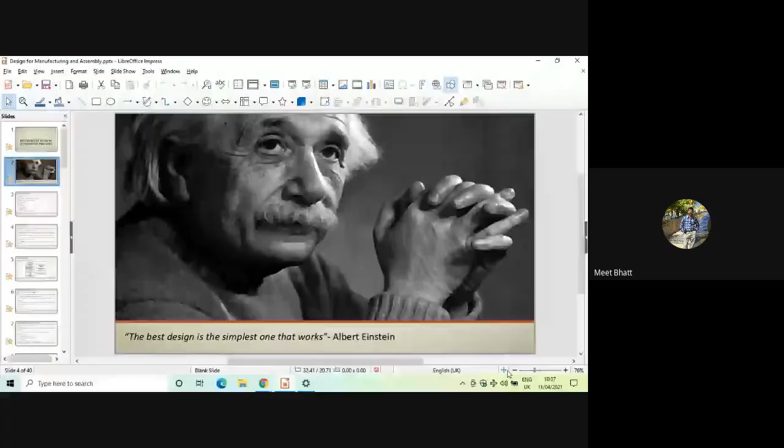I will just switch off my camera to improve... Okay, so now starting with what is DFMA. DFMA is one thing - my screen is visible? No, Meet, no. Oh no, sorry, I forgot, please go for present now. Yes, yes, I forgot to share my screen. Thank you. Now it is visible. Yeah. Sorry, now it is fine.

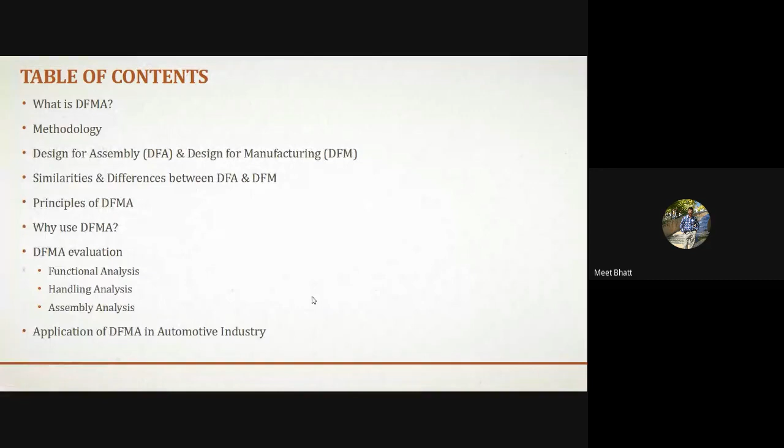Please go ahead. So this is the quote: 'Best design is the simplest one that works.' And second thing is the table of contents, what we have just spoken about. Now coming to what is DFMA.

When any organization, company, supplier, or OEM designs any product, a part or assembly, what is considered is the customer requirements. Customer requirements are based on the function. For example, if we want to sell a bike, the company will decide the function of the bike, then the cost it wants to sell at, and which market segment. If we want to be in a mass segment, we cannot keep the cost at 1 lakh - we have to keep it at an entry level price, around 50,000 to 60,000. We have to understand that people will use it for regular commuting, not for long drives.

And the most important thing is how easy it will be to manufacture or assemble it. One can design a very good product, but it may be very difficult to manufacture or assemble, or very costly. So overall, the product should be a balance between the function, its cost, and its manufacturing feasibility.

If all three are balanced, then the product will definitely meet the customer requirement and it will be successful.

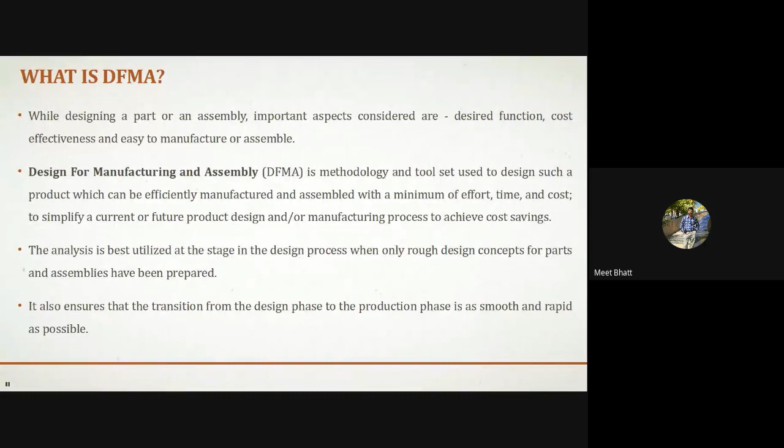Now coming to the DFMA methodology. It is applied as follows: we have a design concept available for a part or product. We then go for design for assembly. In the design for assembly, if there are suggestions coming out for simplification of the product with respect to its assembly, then that input is taken and implemented again in the design concept.

Once the DFA stage is done, selection of material and process and the cost estimate for manufacturing is done in this phase. Whenever any customer or party buying the product asks what will be the price, the company has to finalize their processes, because what material and processes are used will highly impact the cost of the product. So while considering cost, the company has to see what it will cost for design, development, productionization, and also the profit margin. All these things, DFM and DFMA are used to estimate the cost of production and assembly.

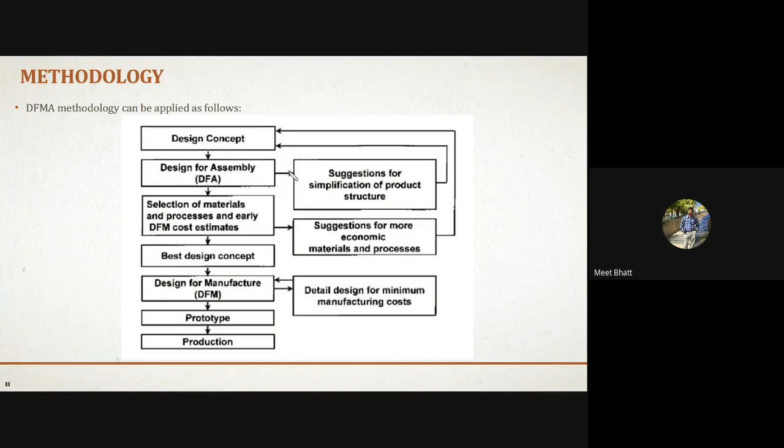So now splitting our subject topic into two phases: one is the design for assembly and another one is the design for manufacturing. Design for assembly is the method of designing the product for ease of assembly. So while designing any product, on one side you have to keep the customer requirement in mind, and on the other side you have to also see how easy it will be for your organization to assemble it.

As I said earlier, you can design a very good product, but it may be very difficult to assemble. And even if it is assembling, it will have a lot of cycle time and a lot of chances of error. So you have to optimize on the assembly front also. DFA tool is used to assist the design team in designing a product that will shift to production at a minimum cost, focusing on the number of parts, handling, and ease of assembly.

So when we are talking of assembly, when you go into any organization, they are speaking regarding the cycle time. How much is the cycle time? How much part it can produce within one shift? So this is one thing which is to be kept in mind while designing a product, which is taken care of by DFA, along with how easy the handling would be and how easy the assembly would be.

And this will go as a significant input for the design for manufacture. So together, this DFA and DFM is called DFMA. The objective of DFA is to simplify the product structure. And why do we do this? Because how many child parts the product has is a key factor in deciding the cost and also the quality.

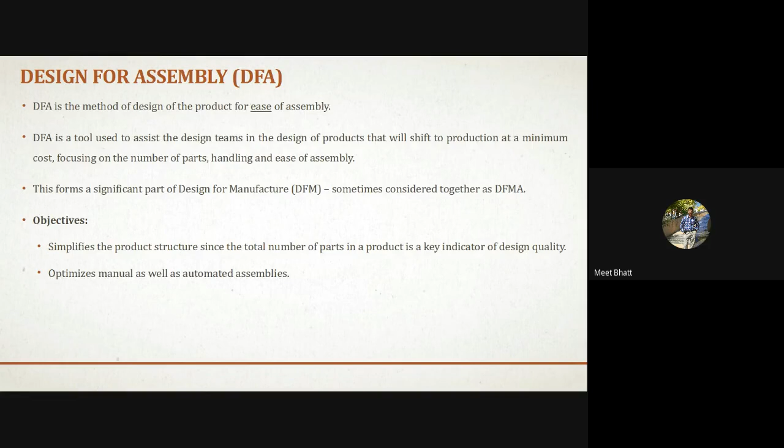Next coming is the design for manufacturing. DFM is a method of design to simplify the manufacturing of the child parts which will form the product after assembly. So once you have decided, okay, I will need 5 child parts and this will be the design, then you are thinking how you will manufacture it. Whether you'll go for a costly material or a material which is just meeting the requirements.

And the second thing is which process you are going to use, whether you will have a fully automated process or whether you will have a semi-automatic or manual process. Basically this will define the cost of manufacturing, how the process will be, and how the material will be.

The broad objectives of DFM are to shorten the product development cycle time, because since you're considering the manufacturing initially itself, whatever failure modes or difficulties are there, you will anticipate. Then since you are also worried about simplicity or reducing complexity, it will definitely help the manufacturing team. Then, as I said, you estimate how much the cost of raw material and the process would be, and if you are reducing the number of components or number of stations, it will also reduce the production cost.

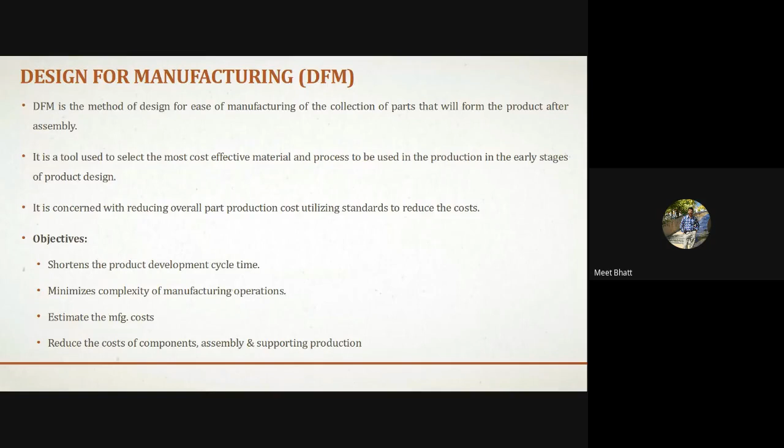Now coming to the similarities and differences between DFA and DFM. Basically these together are called DFMA, but just to have clarity, DFM and DFA both seek to reduce material overhead and labor cost. As the name itself suggests, your design thinking is towards the manufacturing and assembly of the product.

So it is totally like the benefit of the organization which is manufacturing itself. Look, the customer is only paying for the product. He's not bothered how much it will cost you or how much overhead you will need. One organization can make a product with more overhead. Let us say organization one is making a part with 100 manpower, and organization 2 is making the same product with 80 manpower.

So definitely this 20 manpower cost saving is going to increase the margin for the supplier who is making the product, and in turn he may also give a competitive price to the customer. So the customer is also definitely going to go towards the one who is giving the lower and more competitive price. Then the second thing is they reduce the product development cycle time.

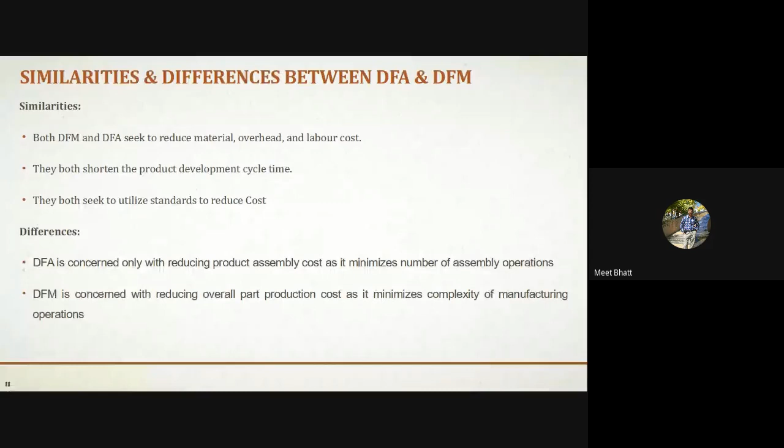Okay, so basically now we are coming to the main part of DFMA. But just before we go further, I want to ask whether everyone is able to follow. Is the pace okay for the presentation? Yes sir. Okay, are you able to relate what I am telling? Yes sir. Okay, so if you feel that I need to slow down, or it is too slow, you can tell me. Okay.

So I feel that the content is presented in a very simplified manner to understand. Even the principles mentioned here, there are total 11 principles or guidelines that DFM is telling, explained using a very simple example, just to ease the understanding of the methodology. But when we apply this in our engineering applications like automotive, the product can be complex, but the methodology will remain the same.

So let us go into these 11 principles. Maybe because they are simple, I will go a little fast so that we are in line with our timeline of the session.

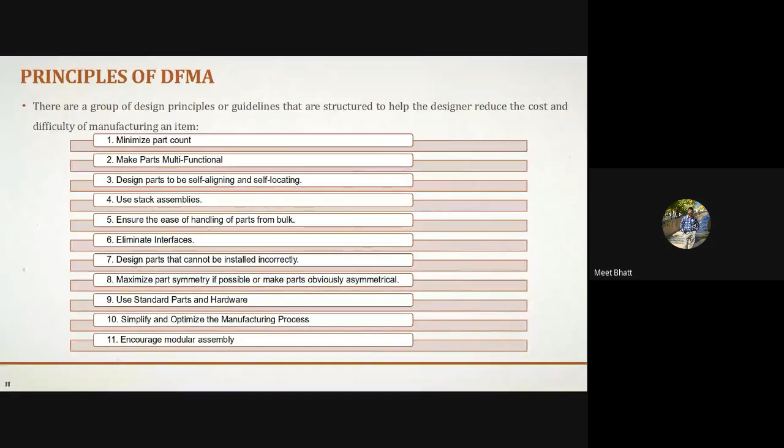So the difference in the organization or any supplier is whether one supplier is able to make the part in a lesser number of pieces, and one supplier is able to make it in a higher number of sub-assembly child parts. So basically when there are more parts, there will be more wear and tear, more assembly and manufacturing cost, everything. So this is the guideline.

The final cost of the product is directly proportional to the number of parts. As the number of parts is reduced, the product quality and reliability typically increase. This is a very basic fundamental. When we use fewer parts, it means less purchasing from outside suppliers, like fasteners, washers, etc. This definitely reduces complete supply chain activities, handling, processing time, development time, and failure modes. For example, you have to look for the failure mode of 11 pieces, so one supplier will not give an okay bolt, one supplier will not give an okay base plate, all these things.

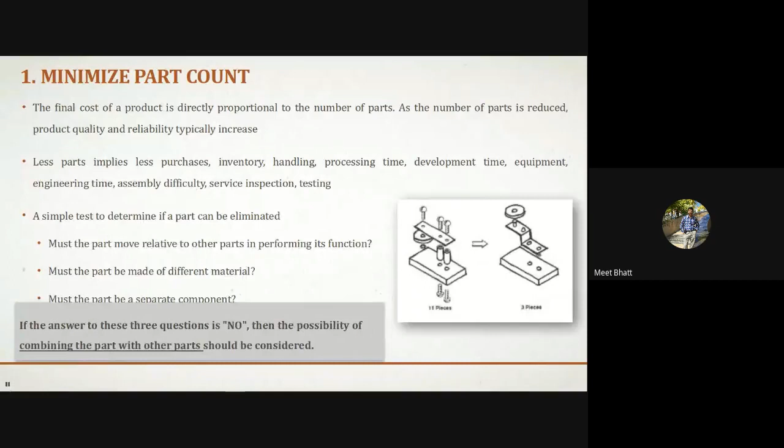And when the answer is no, the question is asked again: is this part of a different material? Already analyzed, is the part separate? When it is a no answer, then definitely it is a B part, a non-essential part. So this is the methodology to decide which are essential parts and non-essential parts.

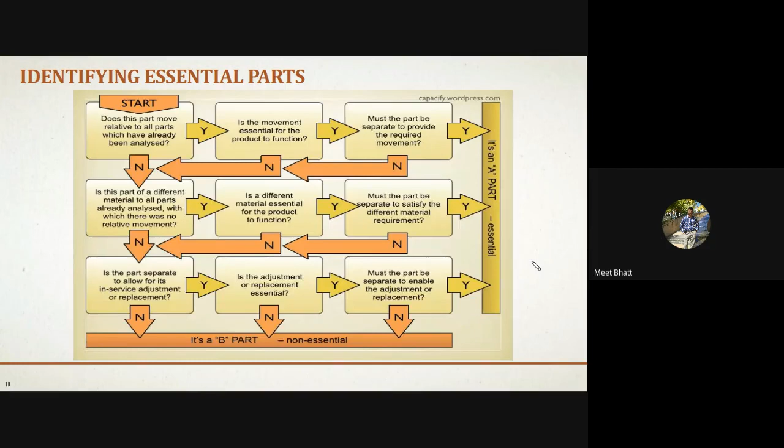Then the second guideline, same guideline, is also saying: avoid separate fasteners. Fasteners are many times small parts, but they increase the cost and the number of parts. Whenever we use something to tighten, we introduce failure modes like thread wash or loose bolt. All these things add to the failure modes, and we have to put one more station to do fastener assembly. So the fastener increases the cost of manufacturing, handling, and feeding operations. All these are additional things which are associated.

Besides the high cost of equipment required for them, the operations are not 100% successful. There are challenges of ensuring that the torque is sufficient, whether it is tightened, whether a bolt is missed, or the fastener is not assembled. So it is better if any organization has a possibility to eliminate fasteners, they can do it.

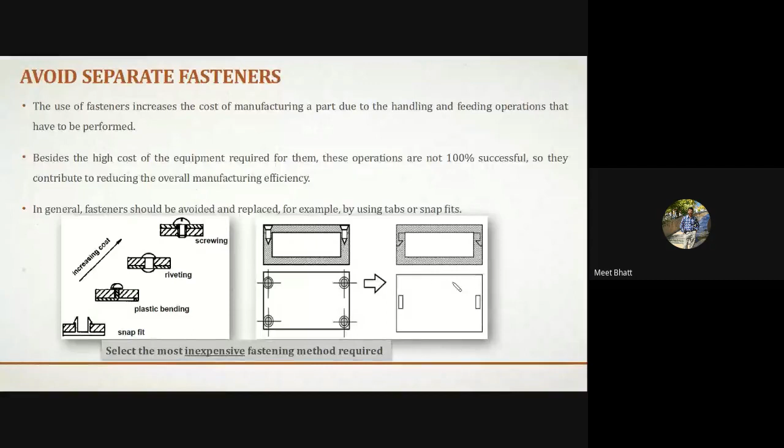So the second guideline is saying: make parts multifunctional. If you are having 5 parts and these 5 parts are doing multiple functionality, then the design is good. Multifunctional parts reduce the total number of parts in design and combine several functions.

The best example, apart from what is shown here, is that a mobile phone is a Swiss knife. Earlier we used to carry one Walkman, one camera, and one mobile. Now one mobile is capable of doing the camera function, the music function, everything is there. So definitely the other things are now eliminated, no need to maintain them, no need to buy them, all these things.

So what we are saying is in manufacturing, different products can share the part, you can design for multi-use. These parts can have the same or different function. So if you are having multiple models of any product, and you have a multifunctional part, they can be used in different models. That is also called platform sharing.

So in automobiles also you see platform sharing. OEMs make some chassis, and the chassis is used in many vehicles. This is one kind of multifunctional approach, rather than going for a separate chassis for each separate vehicle. So these are all the techniques which OEMs use to reduce cost and complexity.

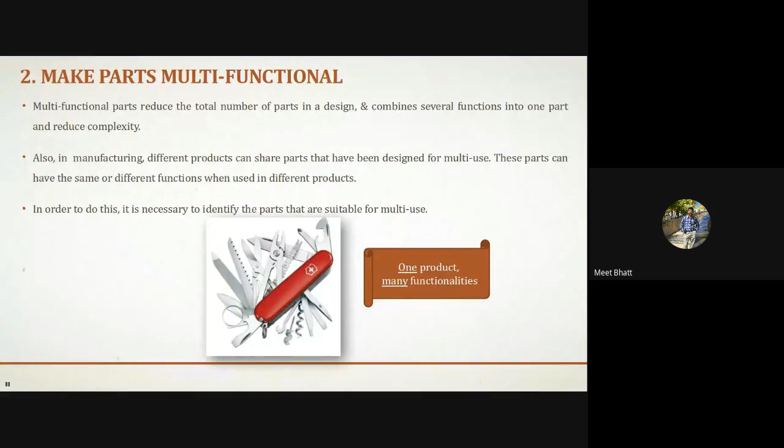Third guideline is saying design the part to be self-aligning and self-locating. All these things seem very small, but when you go into the production environment, I have seen myself that all these things are a very big matter, because the person working on the line is not educated as us, and neither are they given so much time that they can do the work with ease or a relaxing environment.

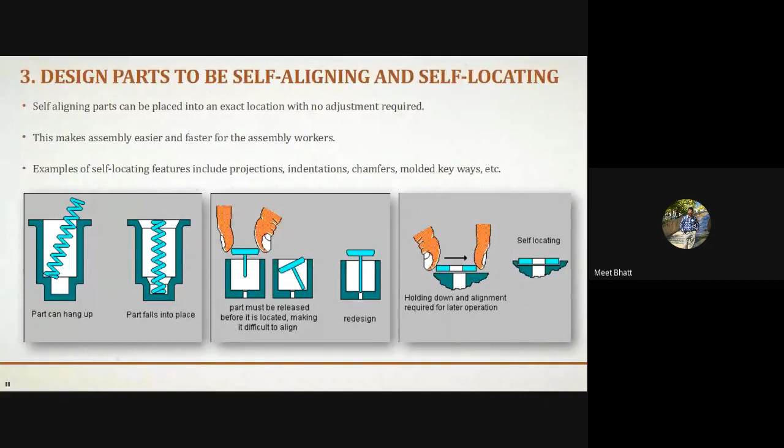Now stack assembly. This guideline says all parts should be assembled in one direction, and the best method is to go for stack assembly, so that everything locates in its place by virtue of gravity itself. Apart from holding something in the direction opposite to gravity, where a person has to hold it or you need vacuum, if you do everything in a vertical downward direction, then everything will get assembled in its place by virtue of gravity.

This is one simple thing where you can avoid a vacuum machine to hold the part, or a person holding it by hand. These are simple techniques, and the part should not be required to be oriented again and again, or need careful orientation. It should be easily able to locate in the assembly.

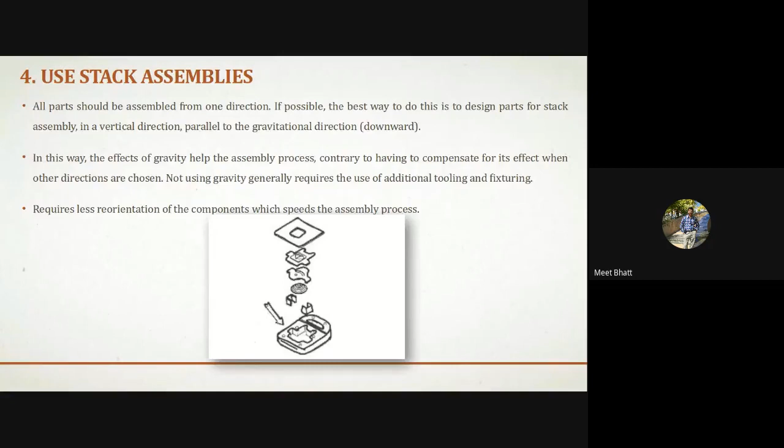These are basically parameters like stickiness. If the part is sticky, the operator will take some time to clean his hand. Or if the part is slippery, it will fall down, and this will lead to a missing component. How flexible the part is, can it be taken easily and put in place, or how fragile it is. Fragile components need to be taken with high care; we have to give special guidelines and train operators. How heavy the part is - if the part is heavy, maybe the station will require two operators. If the part is too thick, it cannot be a single-handed operation.

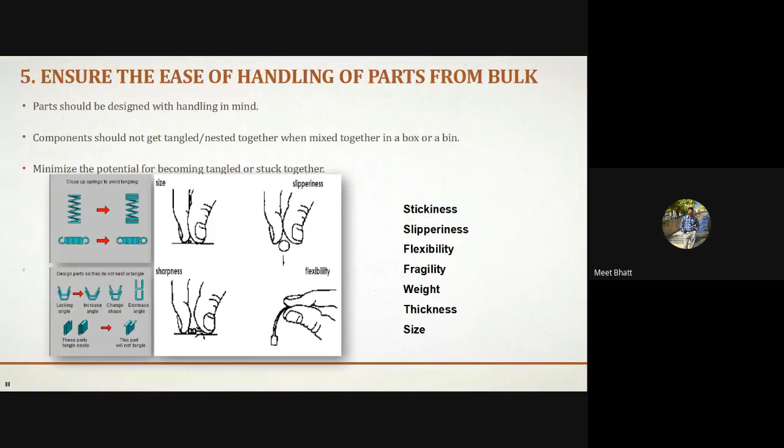The sixth guideline says eliminate interface. As you know, an interface is nothing but a failure mode, and from a reliability point of view, we always say these are the weakest points for failure. The more joints or interfaces there are, and if stress is increasing in this area, definitely failure will start from this point. A greater number of interfaces will definitely mean more stations, more processes, more poka-yoke, etc.

And you have to control the quality, as I said earlier. One part is coming from one supplier, another part from another supplier, so you have to control two dimensions, two tolerances, then two people - one bringing one part from the store, another bringing another part - material cost, everything. Best is to integrate. You can see the top photo is 2 parts, and the bottom photo shows the same functionality integrated into one part. This is a very simple example, but the same can be applied in any automotive application.

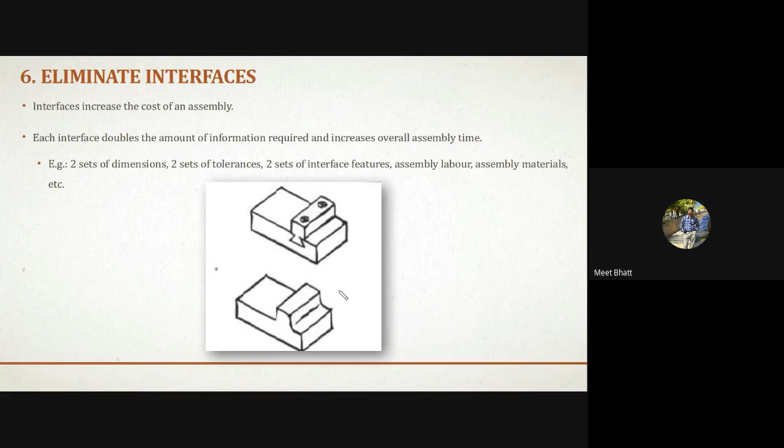And the seventh guideline is saying design parts which cannot be installed incorrectly. So the statement is like this.

Now I have seen many times parts like one-way valve, where there are pipes on both sides. If it is assembled in the reverse way, the functionality will not be met. Many times our process cannot detect this, like let's say a purge valve. It is difficult to detect that application or check that functionality at our end. So it goes further to the customer and leads to a complaint during operation.

So there are some failures which can be detected, some which cannot be detected. So the best thing to do is design in such a way that there is no wrong mounting possibility.

You can see the plate which has to be assembled: one hole is of smaller diameter, the other of higher diameter. This is the best method to avoid assembly mistakes, because unless it is a robot, there will be errors in assembly. And one big problem in production is changing manpower, so you have to ensure the design is good enough that any new person coming in doesn't make a mistake.

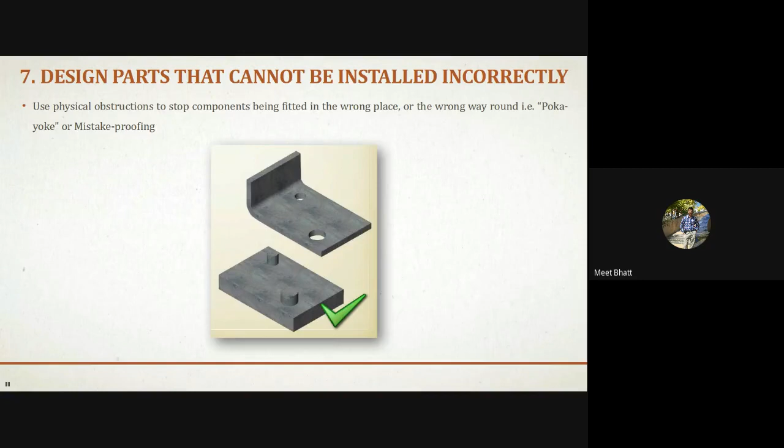Eighth guideline is saying maximize part symmetry where possible, or make parts obviously asymmetrical. These are the two options. On the left side, there is a cylindrical shaft with a chamfer on one side. So when something is given on one side, that means it has to be mounted on that particular side, and orientation needs to be matched.

But when the design is symmetrical, you don't have any concern about mounting it upside down or otherwise, so the operator need not worry which way he mounts it. But if it is one-sided, every time he has to check, and this leads to high cycle time and need for skilled manpower.

Then the second thing is, if it has to be asymmetrical, why? Many times there are things which have to be matched. I see in my day-to-day work that some parts need matching with other parts. So if you have a disc as shown here with 4 holes, you always have to match one hole with another where you are assembling, and there are high chances it will be assembled in the wrong manner.

So when you use a disk with a flat side, there will be no chances of error because it will not be able to mount the other way. The design of the opposite part will be such that it cannot be assembled wrong, so you are eliminating the possibility. In quality, they always say eliminate things at the occurrence, not at the detection.

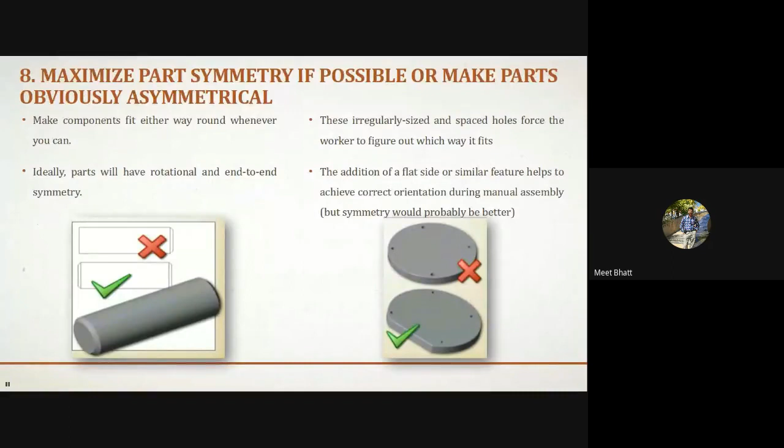So ninth guideline is saying use standard parts and hardware. What this means is, don't go for something too unique. Go for standard catalog parts, because when something is standard, you easily have a contingency plan. For example, if one supplier suddenly stops operation and you have a part which is too unique, you will suffer in production because no other supplier can make it.

Other thing is, if you have different variants with different parts for each, there are chances of mix up. If you use standard parts, the lead time will be less, because if there are four suppliers, all four can make the parts the same way, and any part can be used in any model. Also the number of tools required will be less because the parts are the same, so the fixtures and everything required will be standard.

So while designing, the designer should keep in mind the part list and go for standard parts wherever possible. For standardization, there has to be good communication between the design team, because each one has their own objective. If they communicate well, things can be standardized. Standardization is a big problem everywhere - in design, manufacturing, any company.

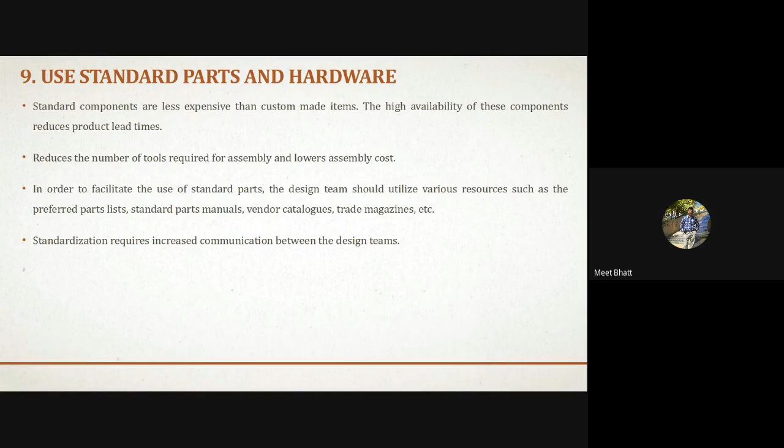Coming to the 10th guideline: simplify and optimize the manufacturing process. The product should use a good combination of material and process to optimize the overall manufacturing cost. If we select a material which requires a specific kind of manufacturing process, we end up increasing the manufacturing cost or product cost.

Wherever possible, try to avoid specialized operations like painting, polishing, or finish machining. Of course, if the product requires it and it cannot be avoided, there's no option. But as far as possible, go with alternative methods which are not costly.

Excessive tolerance and surface finish requirements are commonly found problems that result in higher than necessary cost, so we end up giving very close tolerances. Many times the tolerances are not properly defined, which leads to manufacturing issues. The supplier gives some tolerance, our product has some tolerance, both go to extreme ends, and finally there's an issue. Surface finish requirements are also not properly defined. All these things have to be clearly defined and in line with the manufacturing process.

The process has to be simplified and optimum to reduce the recurring, direct, and overhead costs. If you have more fixtures, it requires more wear and tear, more PMI, more persons. So this has to be optimized from the start itself. Anything you do from the start gives the best result rather than doing it in between.

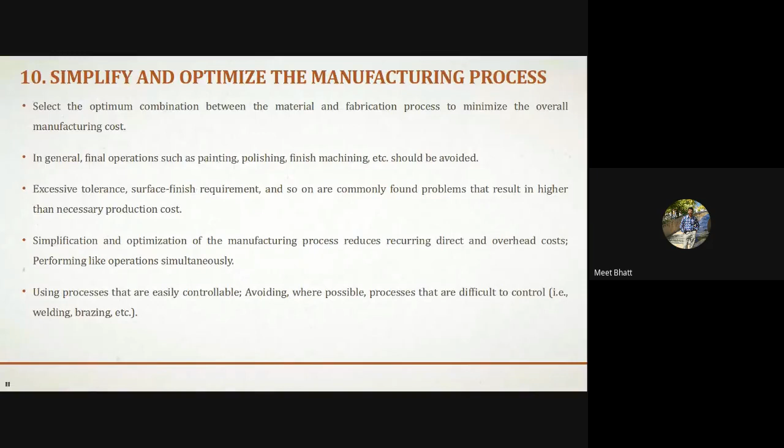Now, encouraging modular assembly. This guideline states that any product should be a modular assembly, meaning if any child part or sub-component is faulty, you should be able to replace that component in the assembly and the product should work fine. Or let's say you made a product at the end of assembly and found one defect - it should be repairable by replacing that component rather than scrapping the whole product as a single unit.

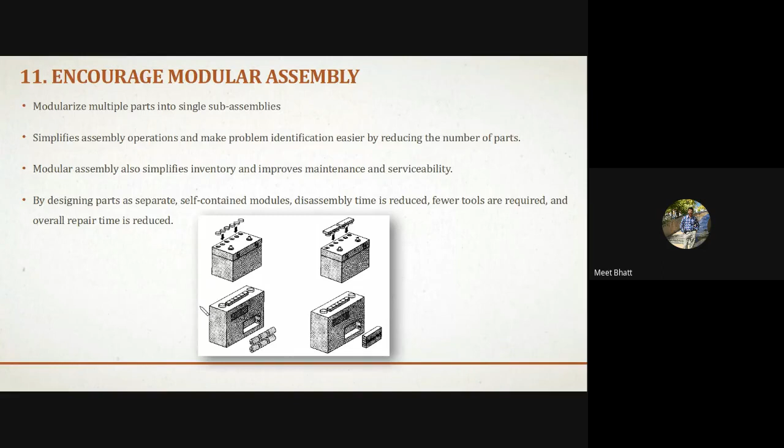One example in today's life is the mobile phone. The batteries are integrated in the mobile phone; hence if there's an issue with the battery, you cannot use the mobile. This is a disadvantage of not having modularity. Earlier we had mobiles with removable batteries, so we could easily replace them.

Now, quickly going through this - why use DFMA, the benefits. When we use DFMA, it encourages designers and manufacturing engineers to collaborate. The big gap in today's time, especially in countries like India, is a big difference of opinion between the development and production teams. I have worked in both environments, development and manufacturing.

Development people have a mindset that the production or manufacturing team are not able to understand or execute their designs. The manufacturing team has a perception that the development team designs things which are difficult to manufacture, without thinking about feasibility. When you use a DFMA tool, you're getting input from the manufacturing team about their problems and implementing that in the design. So definitely there will be more synergy.

As we've seen earlier, this leads to shorter time to market, because the product developed already considers manufacturing feasibility and ease of operation. The organization will quickly be able to go through production and then launch. Lower assembly cost and time, and reliability increases - while you're targeting cost and time, product reliability also increases because the number of parts is reduced and the product process is simple.

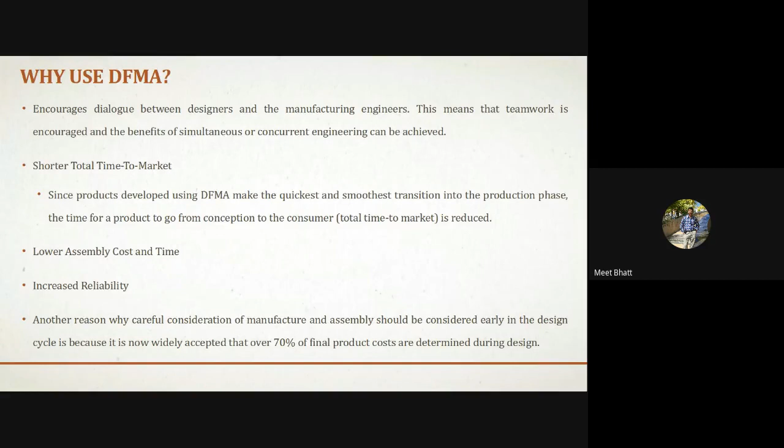So now, because of time, I have to go quickly. There are some important parts remaining.

Nikun sir, is it possible to extend some time? Like half an hour or 20 to 30 minutes?

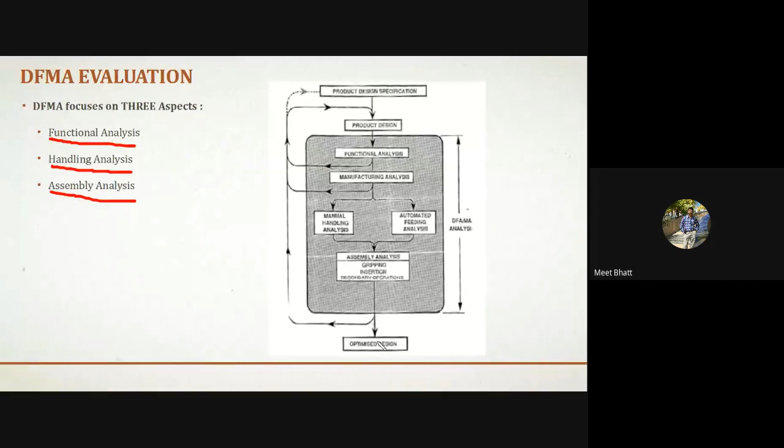Coming to the calculation part, I find this methodology good because it is objective, not just theory. When you take any product or part, you are objectively telling what is the efficiency of this part with respect to manufacturing and assembly. Whenever there is objective evaluation, it is always better than just telling the part is average, good, or best.

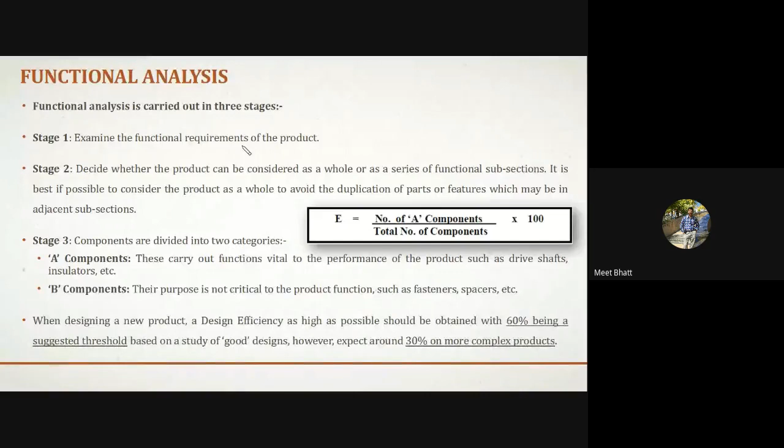So, handling ratio - okay, I forgot to mention the function analysis calculation. Function analysis is calculated as number of A components divided by total number of components, multiplied by 100.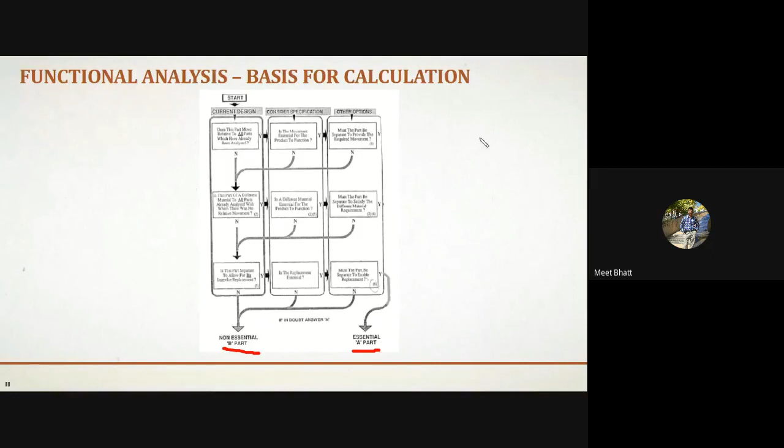Coming to the handling ratio, it is calculated as the sum of individual handling scores divided by total number of A parts. We have to be careful while calculating - the handling score will be calculated based on the next slide, and total number of A parts is the functional part. The ratio less than 2.5 is considered good for handling.

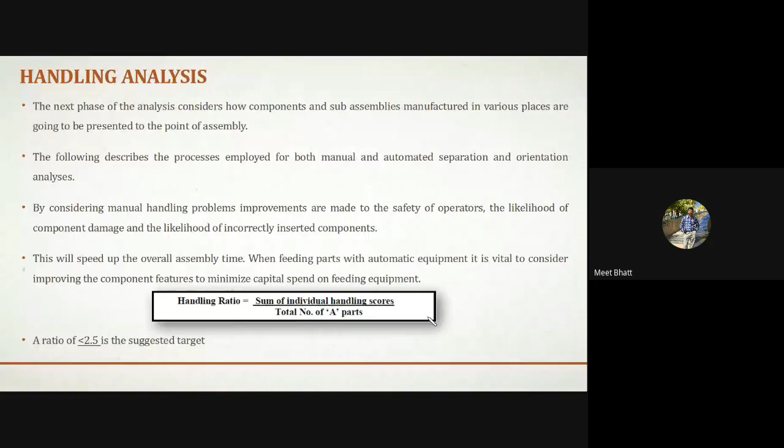This is the basis for calculation of handling analysis. You can see there are A, B, C, and D, 4 types of handling criteria. The photo is not clearly able to show, but I will just tell you.

Part A is related to size and weight of the part. If the part is very small, or convenient to handle, or heavy, or large and heavy, 2 persons are required. So the score increases with complexity.

The handling difficulty - if the part is fragile, it can tangle, or there are sharp edges. No handling difficulty means 0. So if your handling difficulty is high, the score will be high.

Then orientation of the part - it may have to be assembled in a specific orientation only, or rotated, or require pre-tightening. This type of thing increases the score. So overall your handling index will be A plus B plus C plus D. Higher the score is not better, because it increases your ratio.

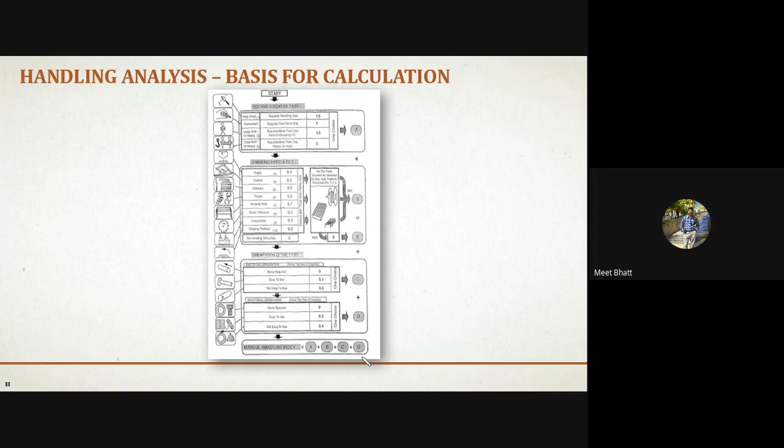Then assembly analysis. Assembly ratio is the analysis after the product is brought to the station - how easily it will be able to assemble, how will be the tooling requirements, will it be complicated or simple, and how will be the testing of the part - will it be difficult testing with multiple stages?

For assembly analysis, there are three subcategories. How is the part gripping on the machine? How is the part insertion? And what are the secondary operations?

Gripping is the ease with which any part or assembly can be held from a feeding point up to insertion stage. Insertion is the relative ease or difficulty of carrying out each assembly task required to assemble. If gripping is easy, you have less cycle time. If insertion is easy, it leads to fewer errors.

Secondary operation includes auxiliary processes - you may have to pre-tighten, do some welding after this, or use adhesive. Try as much as possible to avoid secondary operations. The assembly ratio is calculated by gripping cost plus insertion process cost plus secondary operation cost.

So now the point comes towards the cost - how is the cost finally, in terms of manpower and machine. The target is to have an assembly ratio of 2.5 or less.

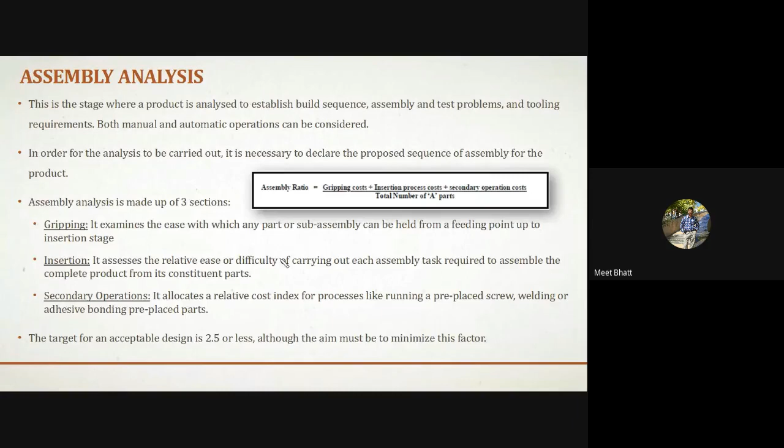This is the table. I'm not going into deep detail, but as the complexity for gripping and insertion increases, the insertion index and gripping index increase. You can see the category where the component has no surface for gripping - this type of component has the highest ratio, 2.5.

When we see insertion, if the part has a self-locating insertion process, it has an index of 1. If there's some bending or riveting process, it has its own failure mode - more process means more failure modes and more time added. So you add A, B, C, D, E, F to get this insertion index.

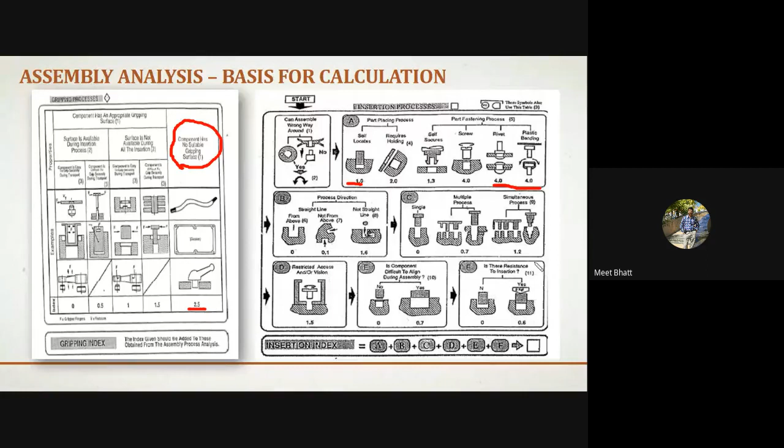So this is the calculation basis for assembly. Now let's go with a simple example before entering our interesting topic of relevance in the automotive industry - this is the example of a pen, and we have to do a DFMA of a pen.

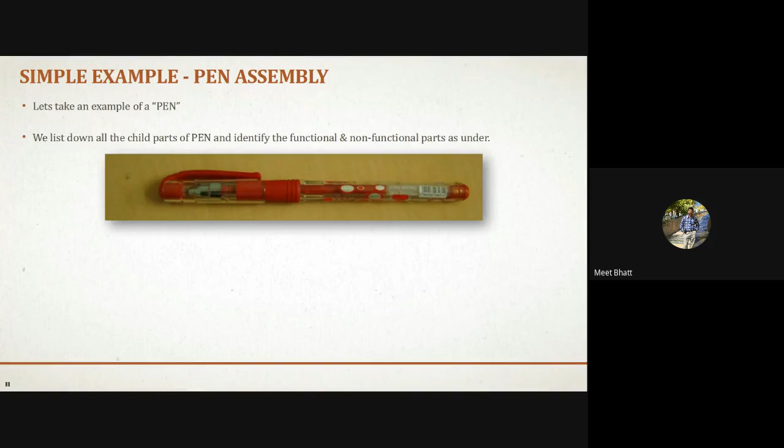Functional and non-functional parts have to be identified. In this example, the refill is the functional part because it is writing. The grip, this part, and the cap are all non-functional parts. Different companies do their cost cutting - maybe they will eliminate one, or have a single part.

Refill not removable - all these are different techniques which different companies use. A costly pen will have everything; maybe a 2 rupee pen will not have any removable part - it's one-time use and throw.

If we calculate the design efficiency - number of functional parts is 1, and total parts is 7 (6 plus 1) - the design is 14% efficient. So you can see how the company is going with this design.

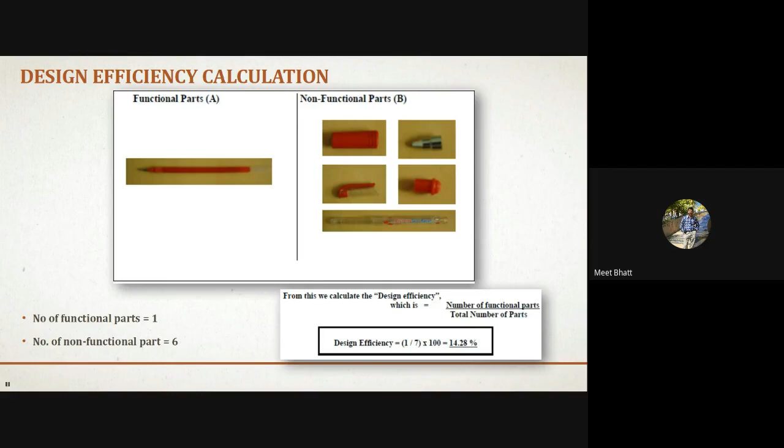Maybe he will have more cost of this product, or less market share, whatever it can be. So the DFMA sheet is calculated with functional analysis, handling analysis, and assembly analysis.

These are the parts listed in the column, then the quantity, then the functional analysis - whether essential or non-essential. Handling analysis as I said - A, B, C, D. The total is done; the total of handling analysis is this one, the sum of all this.

Then the assembly analysis - the score is given for the insertion index, secondary index, gripping, and the total of all these is given here. So you can make a DFMA table for any part - design efficiency, handling ratio, assembly ratio - and then decide.

Now I am at this stage - which stage can I go further? I can further reduce this. Can I make this 6.4 to 5? Can I go to 2.5? Can I increase the efficiency from 14% to 30%, 50%? So this can be done for any product.

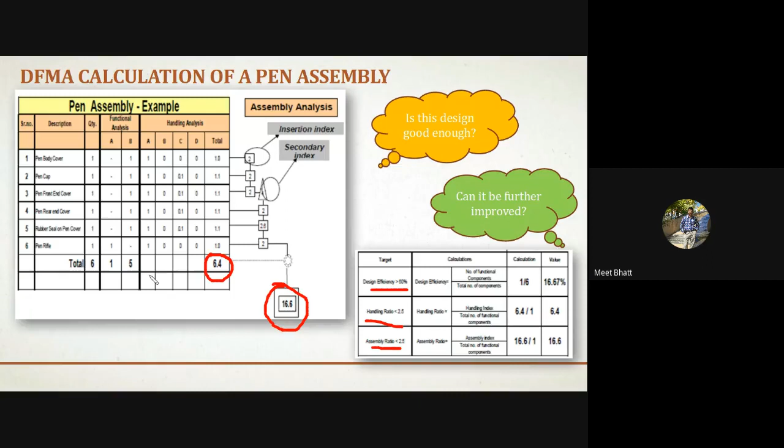Now coming to one interesting topic, which I have personally experienced. This goes back to my internship at Tata Motors, done during my college time in ADIT, 8th semester. So this topic is very close to me because I have used it personally. Just to clarify, this fundamental, DFMA, is relevant in any industry, but since we are working in the automobile and mechanical industry, we are giving this example. This is a standard concept, and this concept is used inline along with the benchmarking methodology.

So everyone must be aware of the benchmarking concept. Anyone can give any idea what is benchmarking? Any student colleagues?

It benchmark means related to total performance of the material or any elements. Okay, you are close but not exact. Anyone else?

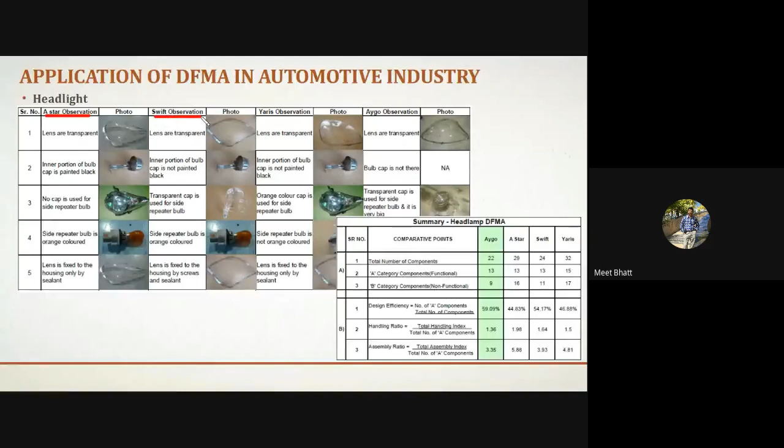So what you are seeing here is one benchmarking process that I have done. There are four models: A Star, Swift, Yaris, and Aygo. Some of these models were available in India, some were not. This is from 2010. So we are taking one product, let's say a headlight, and comparing it.

We are dismantling the product and comparing the different child parts of different models or different OEMs. Of course, these are external aesthetic parts, so they will definitely not match, we know that this part will not look the same. But what we have to take note of is what material they are using, what is the weight of material, and what are the processes of joining them, whether they use fasteners or some kind of adhesion, or some internal parts.

Whether they are combined, for example, a bulb cap is not there in one. So why is this bulb cap there? Can we meet the function without this bulb cap? Then the functional part like the bulb, what rating are they using? Can we reduce the rating if it is within government guidelines? So these are the things which are the benchmarking topics.

And once we are done with the benchmarking, then the next thing is DFMA. So we can calculate, for Aygo, A Star, Swift, Yaris, the total number of components, total number of A category functional and B category non-functional parts, design efficiency, handling ratio, and assembly ratio. Then we can see which is the best one.

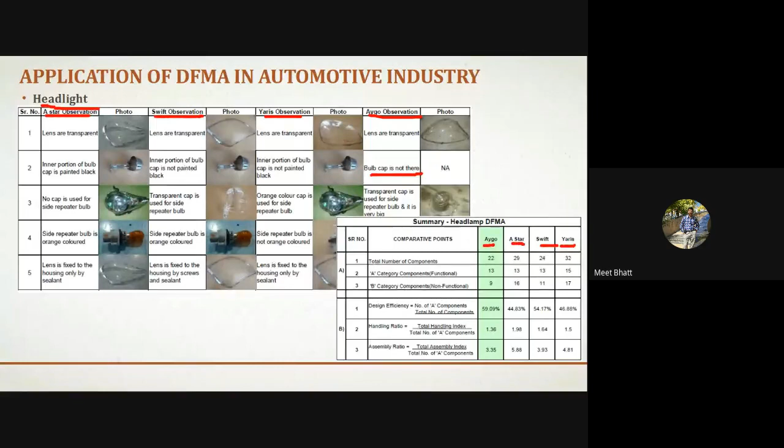This is the example of the tail light. Similarly, we dismantle all the parts and see how simple the product is. The function is the same, tail light, but one can make it simple while another has a complex process.

So in this one also we can see Aygo doing good in terms of number of parts, let's say one is good and one is bad. In this case, the number of parts is a little high, 11, but the design efficiency is 81, so very high design efficiency and very low handling ratio. Assembly is a little bit difficult, let's say, but this is the trade-off which we have to do somewhere.

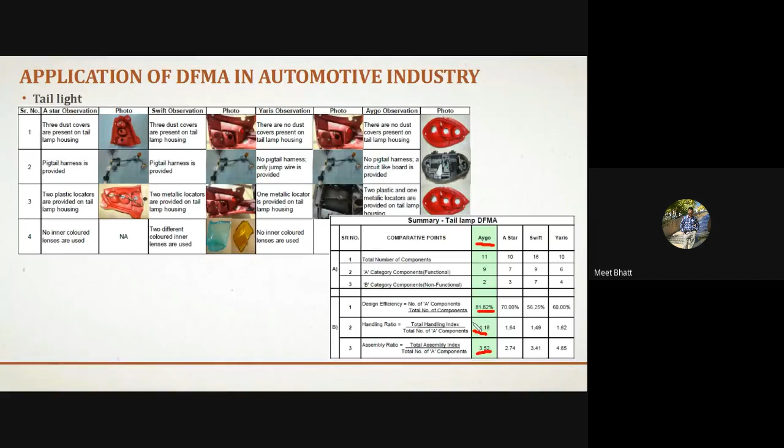This is the seat. So I remember one thing which surprised me. The number of parts, since I was in Tata Motors, so I saw it - Tata Nano having the minimum number of parts as compared to any other. Like if you see i10, there are 200 parts, and if you see Nano, there are only 57 parts.

So just see the number of principles of DFMA it would have used - integrating the component functionality, removing the non-essential things. So all these things, like the design efficiency is 23% here, and here the design efficiency is 35%. Of course, they may be in different segments - Hyundai i10 is entry level premium segment, and Nano is very basic.

But everything is like cost. So how was it made in 1 lakh? This was the method. The Nano vehicle was engineered, and though it was not successful in the market, it can definitely be called an engineering wonder - the whole world would agree that making a car in 1 lakh, there are many things which we can see that were optimized. Even though it was the cheapest car, there was still scope for optimization when we do such kind of activity in DFMA and benchmarking.

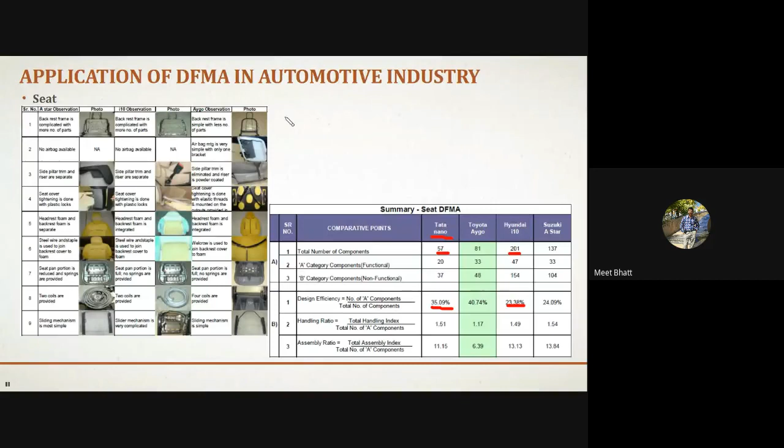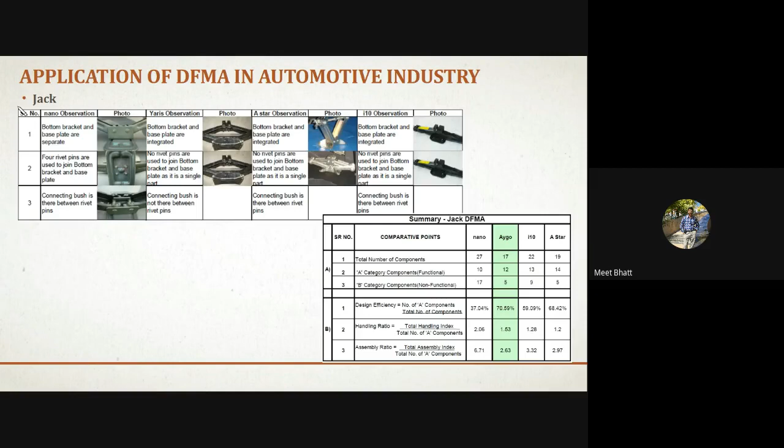And this was the activity. Sorry, I can see some message, but since I'm in presentation mode, I will come to questions later - the presentation is about to finish. So we can see ideas generated - these were after the DFMA methodology.

Some seats were having side reinforcement for mounting the airbag, and some, like the best model, was having some kind of press fitting. This was saving the bracket cost, the assembly and manufacturing cost, all the things. So this presentation showed how this can be done to reduce the cost and number of parts. If we see Nano, there were 4 rivets, and some had integrated rivets with the base plate, so we can save the cost of 4 rivets. This type of idea can come when we are working on design with DFMA methodology.

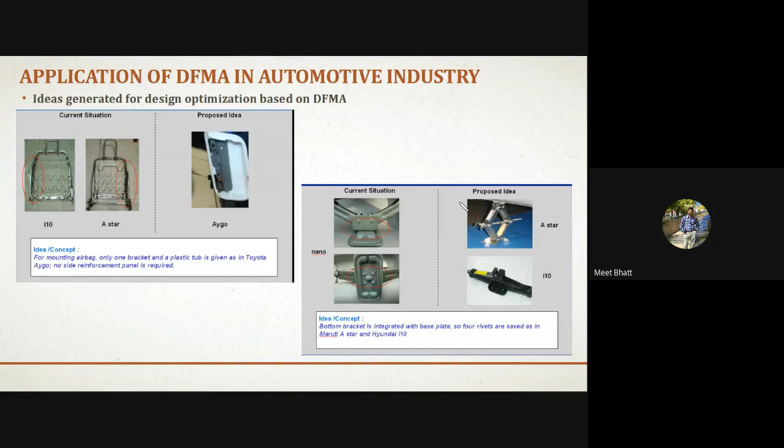So okay, I end my presentation here. I took some more time, like 10 minutes, but after this presentation, if there are any queries with respect to the methodology or any general query, anyone is free to ask.

Any query from any participant? Which type of software is nowadays used for DFMA? Can you give some names, sir?

Okay, so as I said, DFMA basically is a tool which can be worked in Excel itself. But when I was browsing on the net, there are some tools which do this thing. I personally feel this is a simple tool which may not require software, because the screenshot I showed you in the PPT is an Excel screenshot. You just put the number values there based on the table and you get your result. So for this particular DFMA tool, it's not necessary that you have to use software, but yes, I think there can be some software for ease of use, though I am not aware of the name.